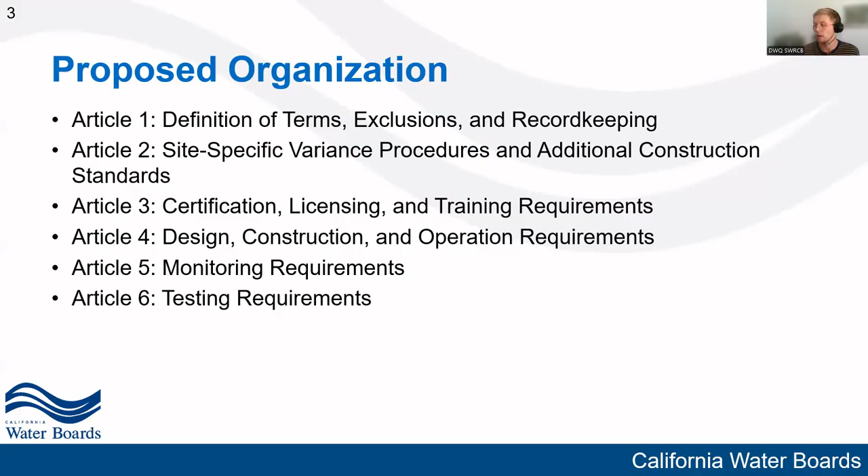Articles 4, 5, and 6 are really the meat and potatoes of this rewrite that establishes the construction, monitoring, and testing requirements for all underground storage tanks that'll be regulated under this new chapter. Article 7 is our unauthorized release reporting and initial response requirements article. 8 covers closure requirements. 9 is our permit application, UPA requirements, trade secrets, and red tag requirements article. Article 10 discusses corrective actions and post-closure abatement requirements. And lastly, we have our appendices, which are our UST forms. Those are being updated as well. We've received some feedback in the past on how these forms could be improved, and we took those suggestions and went forward with them.

So without further ado, let's take a look at our new Article 1. The first definition I'd like to discuss today is the definition for abandoned underground storage tank. This is a UST that has not had a functional release detection system for more than 365 days, does not have a current operating permit, has not been permanently closed or temporarily closed in accordance with the new regulations, and is not what we would call a decommissioned tank.

Abandoned tanks, temporarily closed tanks, and decommissioned tanks all kind of look the same at first glance. We wanted to make sure we had a clear definition of what an abandoned UST was, just because they have different regulatory requirements than those other two classes of tanks. For example, these abandoned tanks will need to be inspected annually and before they are permanently closed in accordance with this chapter. Also, this definition plays a little bit into something we'll talk about later as far as tank reuse is concerned. More new definitions.

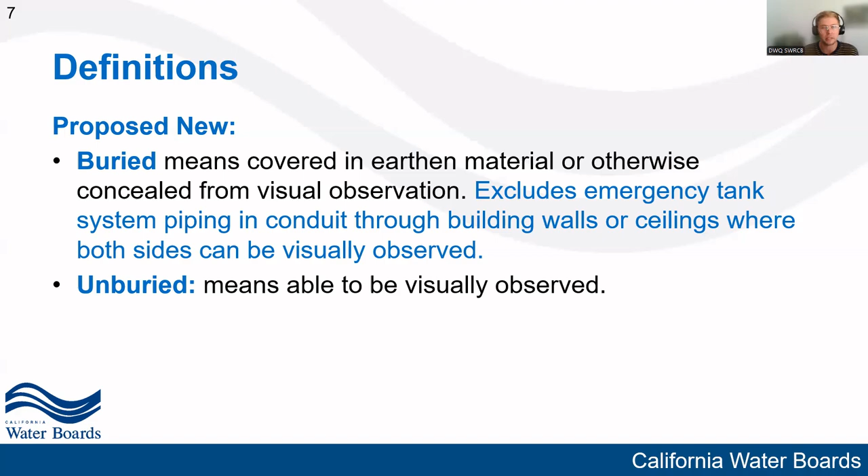We added this exclusion here in blue for emergency tank system piping that is within conduit going through building walls or ceilings if both sides of that can be visually observed. This was based on feedback that we received during our comment period and felt like it should be in our regulations just based on the issues discussed. For clarification, unburied will just mean able to be visually observed, basically the opposite of our term buried.

Another couple terms that are linked together, we have continuity and zone. Continuity being the interstitial space within a zone that is open and testable and allows for the unobstructed flow of hazardous substances. Continuity is one of the key aspects of determining whether or not our secondarily contained systems are adequately monitored under these proposed regulations.

If there's any sort of blockages or cave-ins, we can't say for certain if that interstitial space is being adequately monitored. Continuity will need to be demonstrated periodically as part of the release detection equipment certification, and piping will need to be constructed such that continuity can be confirmed. Zone is the interstitial space of a UST component that is monitored as a single unit. So this could be the tank interstitial space or the piping interstitial space.

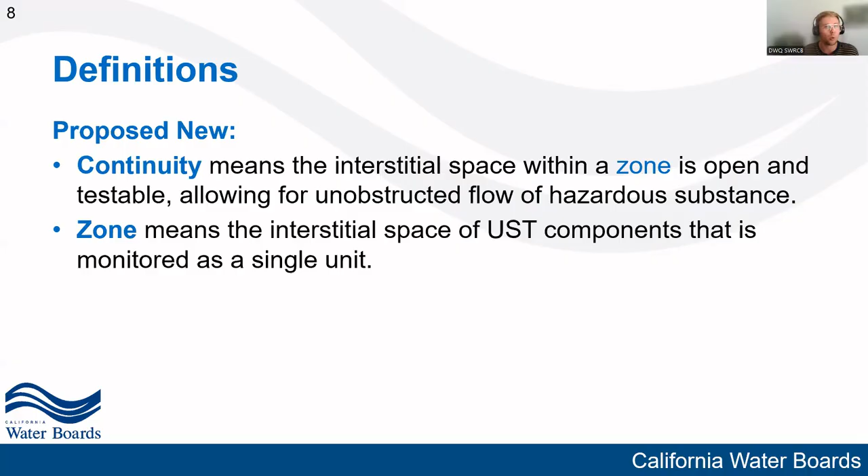We're adding a new class of compliance inspectors to our proposed regulations. Independent compliance inspectors are individuals that perform compliance inspections on behalf of the Unified Program Agency with jurisdiction over a facility or the State Water Board. Independent compliance inspectors need to be independent of the facility that's being inspected, as well as the UPA with jurisdiction over that facility, and still meet inspector training requirements as part of our proposed Section 2634C. We want to make sure that these people who may be helping lower staffed UPAs meet inspection requirements are still qualified to perform those compliance inspections.

We're using the term submit pretty specifically in our proposed regulations, and it means one of two things. If the owner or operator is submitting something to the Unified Program Agency, that information needs to be electronically submitted through CERS or other local reporting portal. All other submittals to the Cleanup Oversight Agency, so this being the Regional Water Board or your local oversight program, must be submitted electronically through GeoTracker.

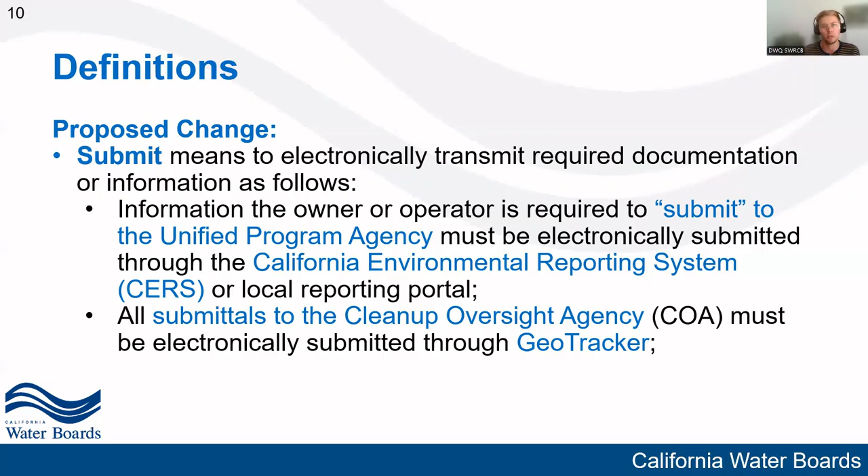And later on in this presentation, we'll show some images of the new GeoTracker portal that'll help automate some of this communication. But know that when we use the term submit in these proposed regulations, it's through one of these two channels, either CERS or GeoTracker. Any other information that needs to be provided rather than submitted could be done via hand delivery, mail, email, or fax.

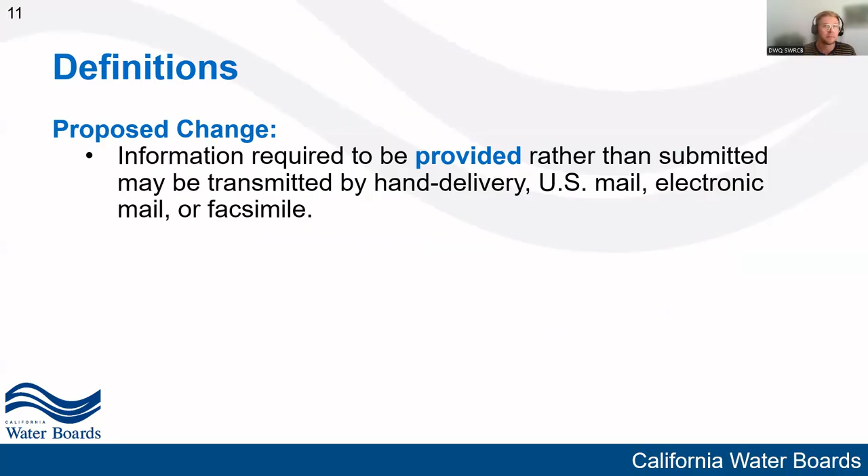We have three different types of USTs in the proposed regulations based on tank install date, type 1, type 2, and type 3. Type 1 tanks will be those UST systems installed before July 1st, 2003. Type 2 tanks being systems installed between July 1st, 2003 and July 1st, 2004. And our Type 3 systems being our tanks installed on or after July 1st, 2004. These tank types are delineated by dates that are consistent with health and safety code, so it made sense to have these definitions in our proposed regulations as well.

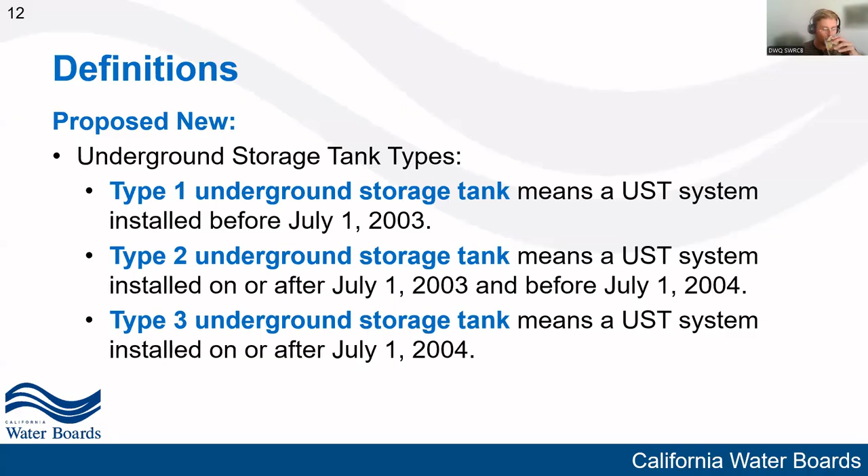We're also adding some violation classifications to the proposed regulations, and Unified Program Agencies, as well as the board, will need to use these violation classifications as part of their inspection and enforcement plans. We have Class 1 violations, Class 2, and minor violations. Class 1 violations being any violation that meets the definition of significant violation. And we have modified the definition for significant violation, but not in a substantive way. Basically, anything that is currently a significant violation will be a significant violation under the proposed regs as well, and therefore a Class 1 violation.

Beneath our class 1 violations, we have class 2s. These are one or more violations that result in a failure to conduct or pass a test. It could be a release detection violation that's not considered a class 1, or it can be a minor violation. And for your minor violation to become a class 2 violation, that minor violation would need to be chronic or committed by a recalcitrant violator.

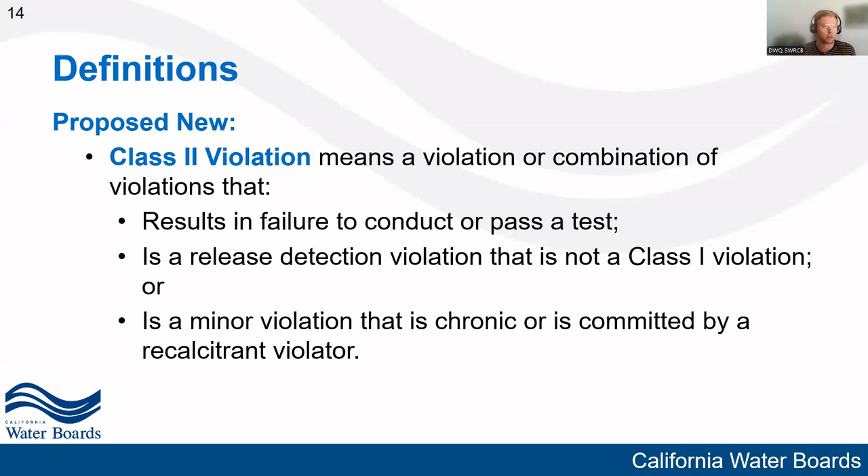Having this graduated scale helps provide a pathway for graduated enforcement so that we can see these systems return to compliance. At the bottom of our violation classification pyramid, we have our minor violations, and this is sort of a catch-all. This is a violation or combination of violations that don't meet the criteria for either a class 1 or a class 2 violation.

Record keeping is also part of Article 1. These records need to be maintained for the life of the UST system: installation, test results, manufacturer's checklists and manuals, and as-built drawings. This is all very important as far as looking back on the history of that system and seeing where something may have popped up that could be an issue that is making itself present later on.

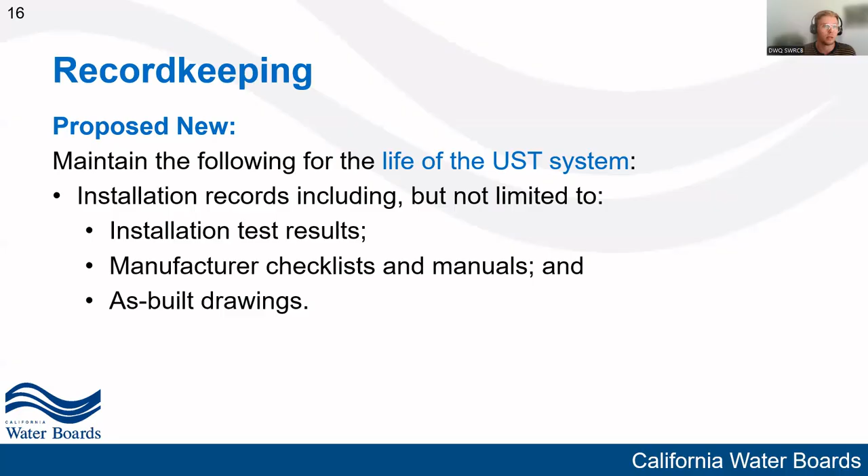Those as-built drawings particularly can be very important to maintain for the life of the system in case there's any sort of repairs to the piping or structures of that matter. Additionally, we'll want records of repairs. So maybe you had a tank lining. We'll want the structural integrity certification associated with that.

We'll need to keep those tank calibration charts as well as our unauthorized release reports. Those tank calibration charts are particularly useful for our overfill prevention equipment inspections to make sure that our OPE is being activated at the proper height.

Electronic records that are readily accessible on-site during inspections will satisfy the requirement for on-site records. UPAs can still approve off-site record storage, but they need to document that approval and any conditions of that approval.

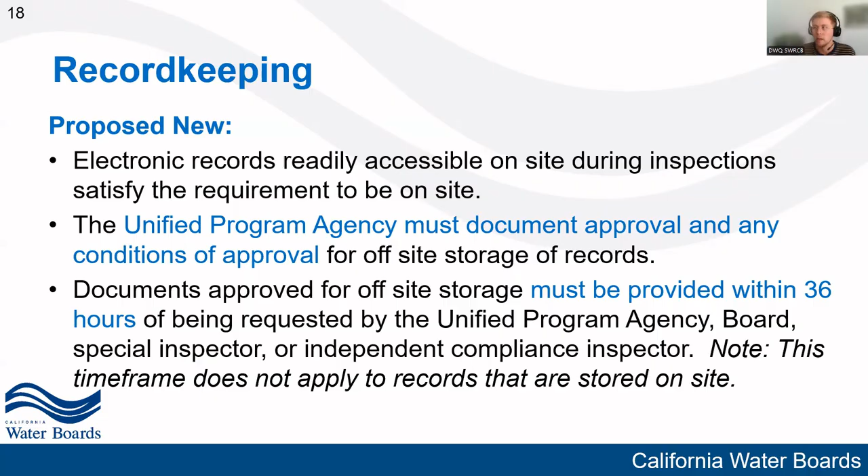Documents that are approved for off-site storage must be provided within 36 hours of being requested by either the UPA, board, special inspector, or independent compliance inspector. This does not apply to records that are stored on-site. Those are expected to be provided upon request.

Approval for site-specific variances will need to be submitted via CERS or local electronic reporting portal. Site-specific variances are very rare, so we want to make sure that we're adequately tracking them, and tracking them in CERS seems to be the best way to do this. We want to make sure that they are consistent with our permit requirements as well as still in line with protecting the soils and groundwater of the state.

Test notification. So this is also a part of our administrative article, but owners and operators will need to notify the UPAs in writing at least 72 hours prior to conducting a test unless waived by the UPA. And part of the reason we have it in this administrative article is so that UPAs can waive this without having to go through more formal procedures, as we'll see described in Article 2. Obviously, we'll want to still make sure that these UPAs are being notified, but they do have the discretion to waive that 72-hour requirement.

So Article 2, our site-specific variance and alternative construction requirements article. This is a change here. We are requiring that the regional boards consult with the unified program agencies and the State Water Board during site-specific variance review. In the past, this has been only the purview of the regional boards. However, they have a tendency to reach out to us at the State Water Board anyway, just for additional guidance.

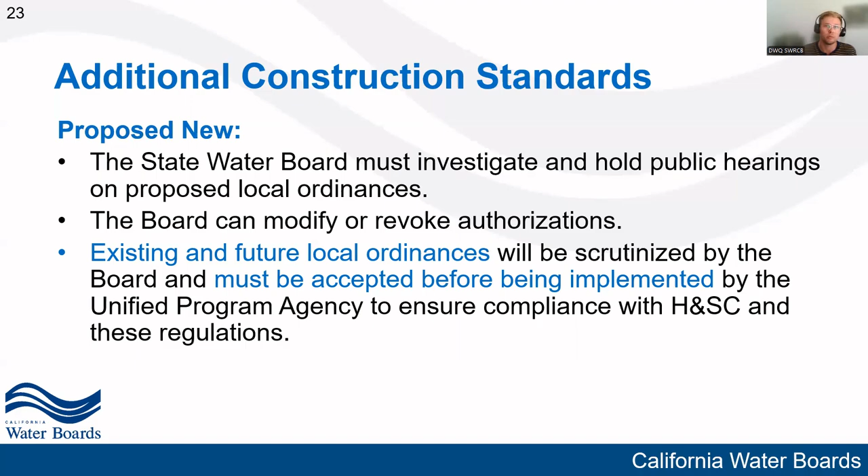Article 3 covers our training requirements for UST personnel. Owners and operators will need to submit the information that identifies their designated UST operator for that facility in CERS. So right now, under our current regulations, we have an appendix for the DO identification.

Moving forward in CERS NextGen, there will be data fields that will need to be filled out, providing very similar identification material. Tracking this in CERS allows for better research and record pulling of these DOs, and it just seems to be a better system.

Additionally, we're going to require that the name of the DO in CERS must be identical to that individual's name on their ICC UST system operator certificate. In the past, we've seen issues with Jims and Jameses and seniors and juniors that have similar names, but they're not identical. And we just want to make sure that the people who are performing the duties of the designated UST operator are actually the people that hold that ICC certification.

For the DO visual inspection report form, we will be requiring that the DO attach a dated release detection alarm history that's generated by the release detection system since the previous visual inspection. This will verify that that alarm log is consistent with the day that the designated UST operator performed their inspection. Now, if the release detection system cannot generate that report, the DO will be required to attach a copy of the facility's alarm log.

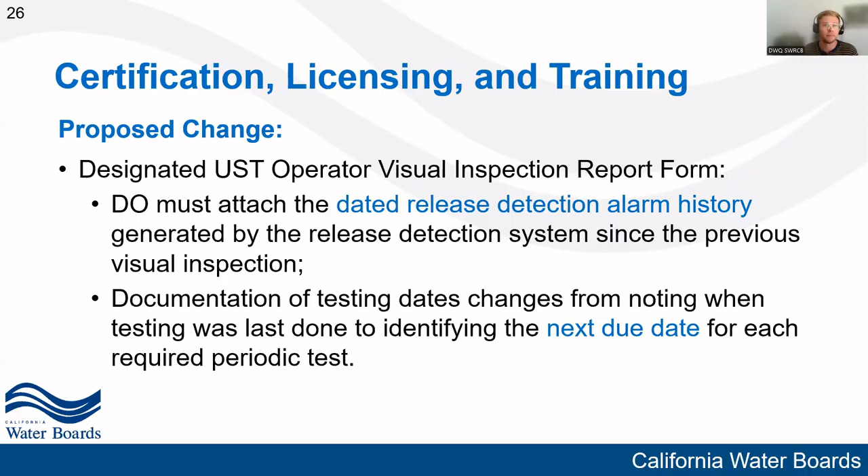Installation or repair work, excluding release detection equipment that does not require excavation or backfill, may be performed by either a service technician or any individual that meets the licensing, certification, and training requirements for UST installation. The training and qualifications for service technicians and installers is not changing. However, the scopes of work for these two classes of UST personnel are being clarified, consistent with one of our local guidance letters that came out probably 2 or 3 years ago at this point. So this is being adjusted for clarification purposes.

Any individual that's performing installation or repair work or is working as a service technician will need to provide all licenses and certificates of training required for the work being performed upon request from the Unified Program Agency, board, or independent compliance inspectors.

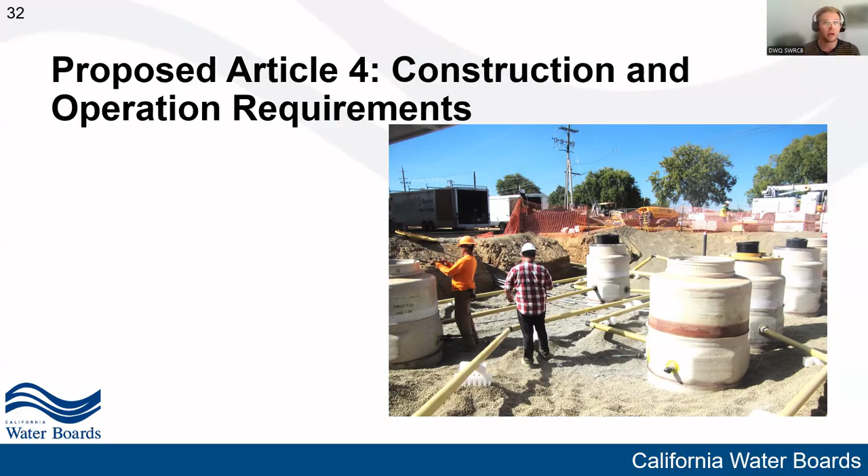So, Article 4, this is where we start getting in the meat and potatoes of the tanks, piping, and release detection equipment. Let's talk first about our construction and operation requirements for USTs. All tank entries under the proposed regulations will need to be made through a manway, and manways will need to be installed per the manufacturer's guidelines, industry code, or engineering standard to ensure that they are properly installed and the integrity of the tank interstice is maintained.

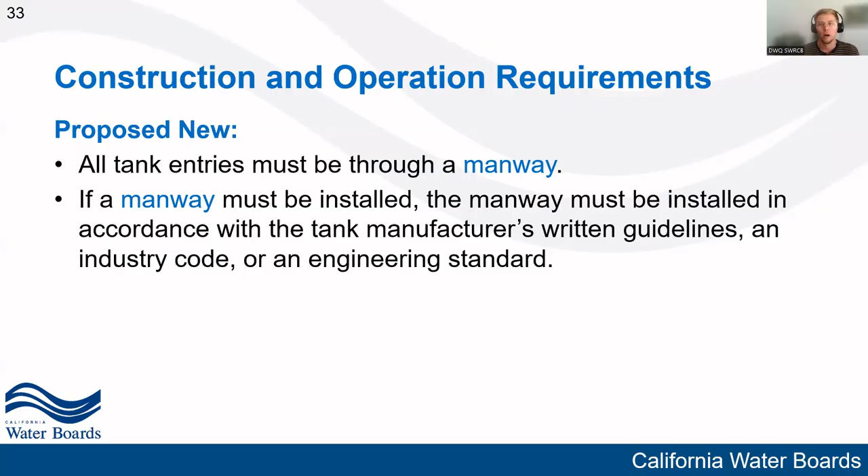When you breach the primary and secondary containment, we run the risk of maybe damaging that interstitial space by either blocking it or crimping it down. And that leads to issues with continuity. And we want to make sure that we're maintaining continuity throughout the system to ensure that the primary and secondary containment are being properly monitored.

For tanks manufactured on or after July 1st of 2026, the manufacturer will be required to provide documentation to the owner that confirms that the manufacturer has verified continuity within the tank interstice. Documenting this from the manufacturer demonstrates that the tanks were built properly and helps serve as a roadmap later on down the road if continuity does become an issue in that system in the future. We can kind of go back through our records and see when that issue may have occurred.

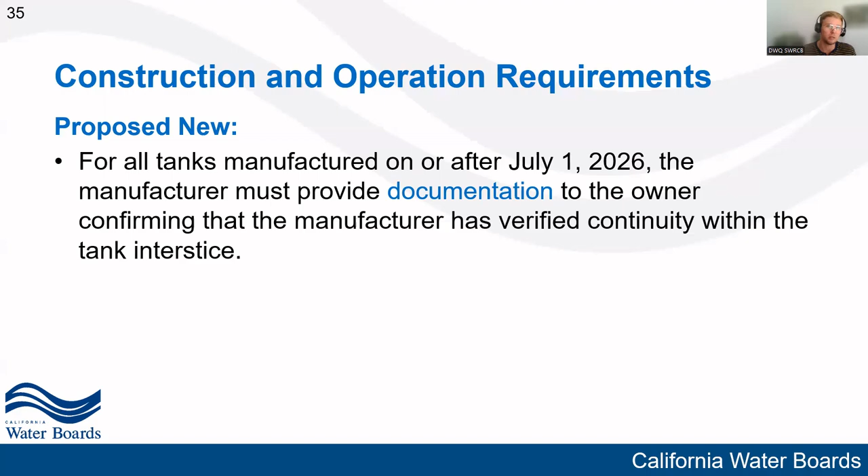This slide is a new requirement, but is likely already a best business practice in the industry. Steel piping that's installed on or after January 1st of 2026 will need to be factory coated black steel that meets ASTM A53. Again, we want to have a minimum thickness requirement for our steel piping that we currently don't have in our existing regulations. We'll be requiring minimum Schedule 40 thickness for our primary containment piping and for our secondary containment piping, Schedule 10 thickness.

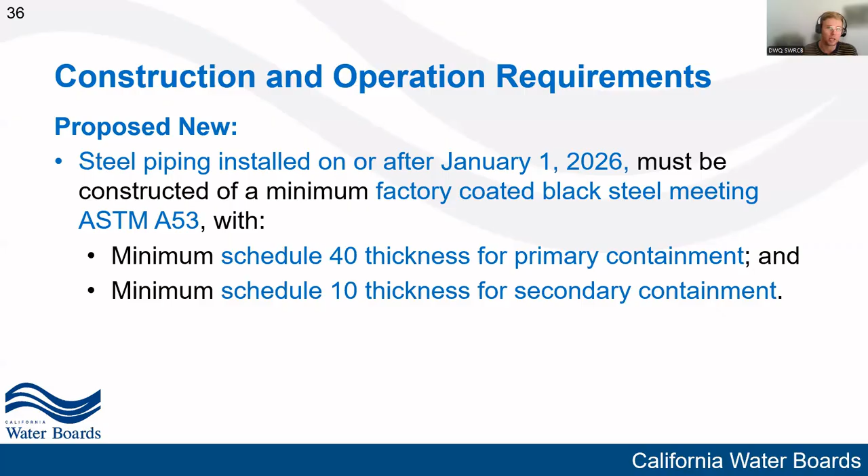For tanks that are installed on or after January 1st of 2027, so a year after these regs have been in effect, they will need to be anchored to prevent flotation using methods specified by the manufacturer, industry code, or engineering standard, or in accordance with an engineering spec approved by a California registered PE. Now, the operative word here is being anchored. We want these tanks physically attached to the ground to ensure that they cannot float.

Our current requirement under the existing regulations is for tanks in areas of high groundwater. And as we've seen in the past, if we have a tank pit open during construction, even in areas of low groundwater, if a storm event comes through, a lot of times those tanks can float, and that is an expensive fix. Moving forward, we'll be requiring that these tanks be anchored at installation, all of them, so that they can avoid that costly repair later on.

Any water that's used to ballast tanks during construction needs to be completely removed and disposed of to the satisfaction of the Unified Program Agency. We want to make sure that installers are not overwhelming municipal water systems, or if for whatever other reason there's restrictions on how to dispose of ballast water, we want to make sure that it's to the satisfaction of the UPA.

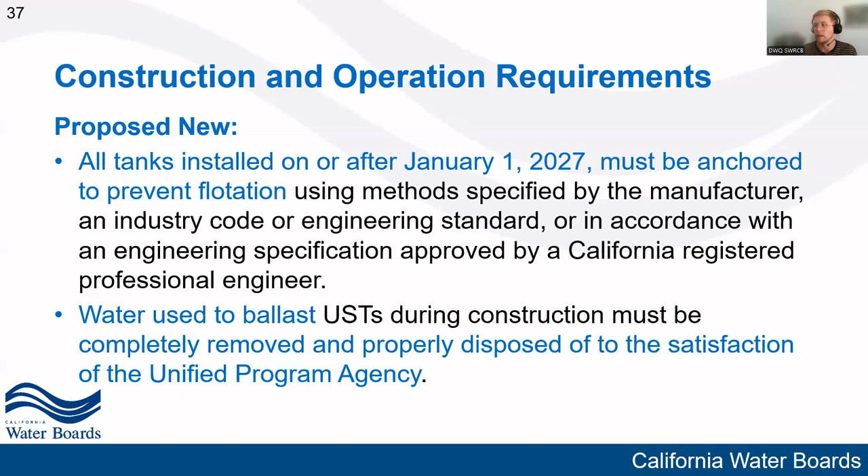For non-integral secondary containment components that use isolation as a form of corrosion protection, any repair made to that component as far as corrosion is related needs to confirm that that component is isolated from the backfill. Basically, if we look into something, we see that there's rust on the inside. We don't want to just simply patch that or spray over it. This may require some additional excavation, but we'll need to verify that the exterior of that non-integral secondary containment still has isolation on the outside, right? So even if we just patch that internal repair, that may not fix the underlying issue of maybe a breach on the outer side of that secondary containment.

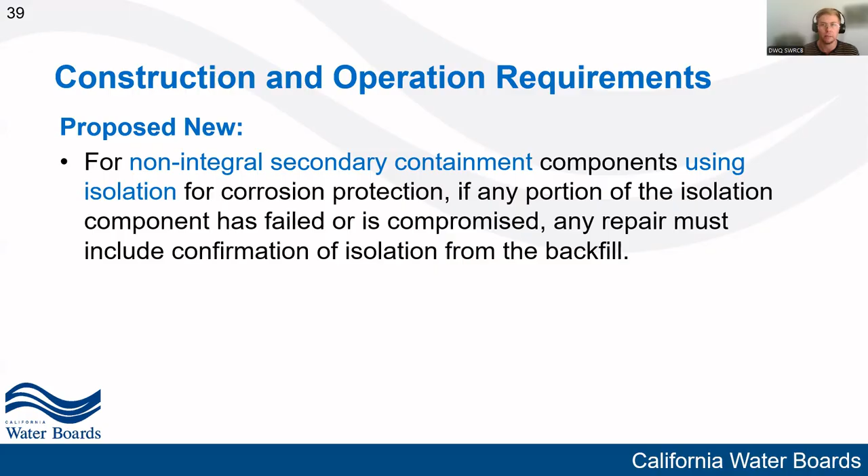Next, let's talk about some monitoring requirements. So we're making some changes to the monitoring site plan. This will need to be a scaled diagram, and it will need to indicate the layout of tanks, piping to the extent known, and containment sumps. Obviously, there are old and convoluted piping layouts, so the to the extent known aspect can be determined by the UPA. We will also require locations of all release detection equipment be identified.

And if you have a Type 3 system, which is our VPH system, we'll require that each vacuum, pressure, or hydrostatically monitored zone be on the monitoring site plan as well. This requirement for a scaled diagram, as we see in that top bullet here, combines the requirements for our site map and for our monitoring site plan. Now we'll have it in one document instead.

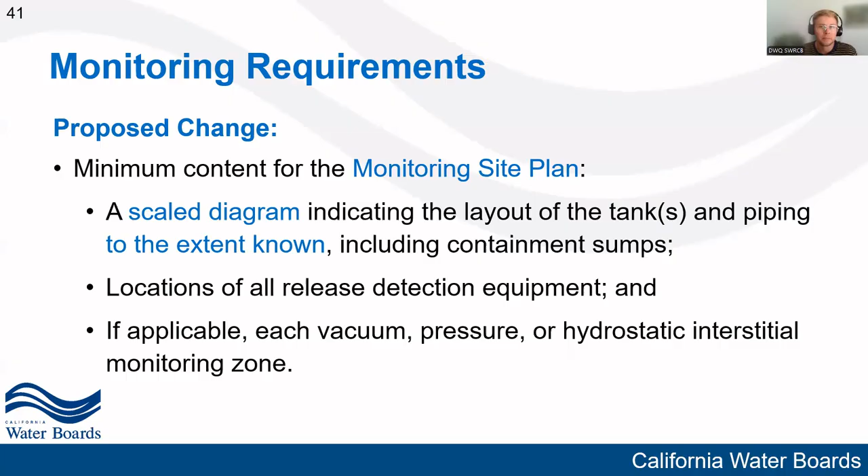So release detection equipment can only be disabled by a service technician with notification to the Unified Program Agency. This proposed requirement changed after feedback received during our comment period. Originally, we were going to require that disabling release detection equipment only occur after approval from the Unified Program Agency, but obviously testing, replacement, and repair can be time-sensitive work. So we have changed this since then to just be a notification to the Unified Program Agency to keep them in the loop.

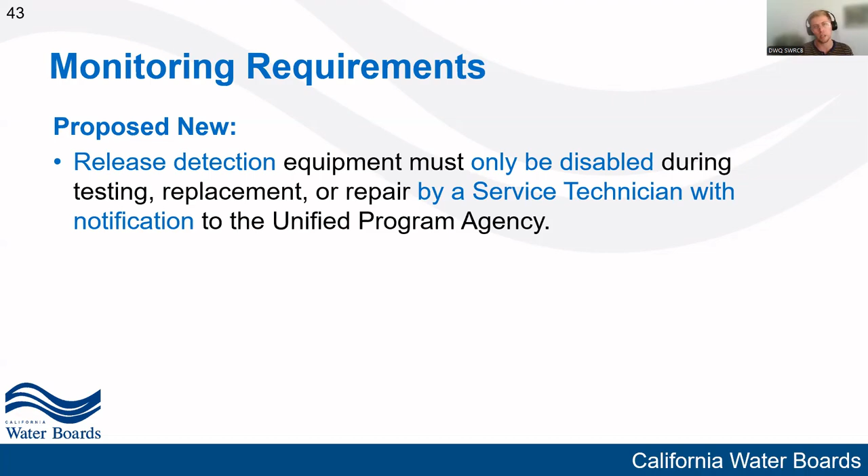For interstitial monitoring release detection equipment that is going to be or is expected to be non-functional for more than 24 hours, the owner will have to implement an alternative monitoring program. This will include physical monitoring of the secondary containment at least once every 24 hours, but the UPA can make that a more frequent physical monitoring interval. The results of this need to be recorded within the facility's monitoring log.

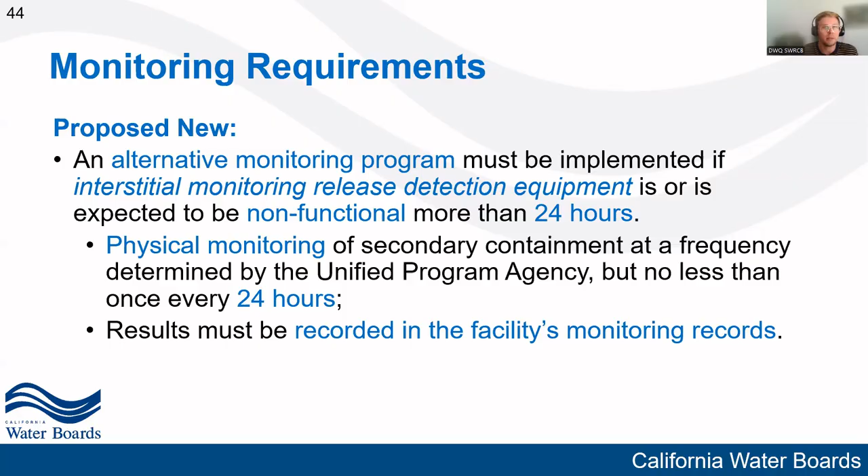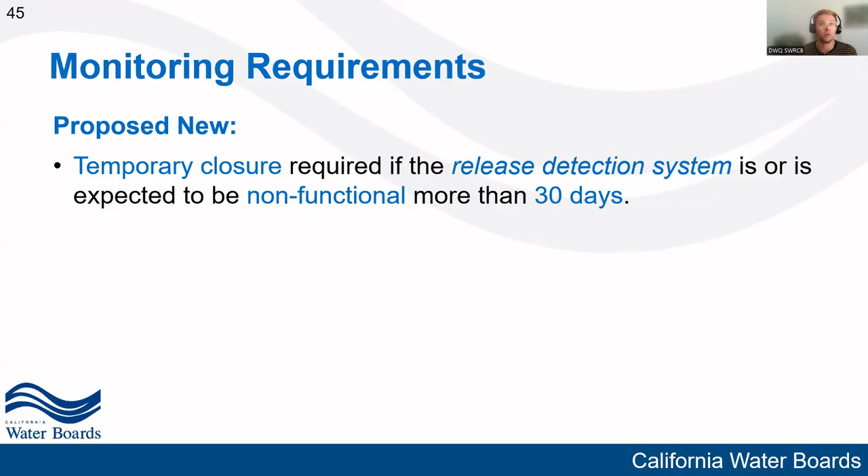This slide is a big change. We'll be requiring mechanical release detection equipment that continuously monitors our UDCs. This includes the impact shear valve. If those fail to function on or after January 1st of 2026, they cannot be repaired. They need to be replaced, and they need to be replaced with continuous electronic release detection equipment before the system can resume dispensing.

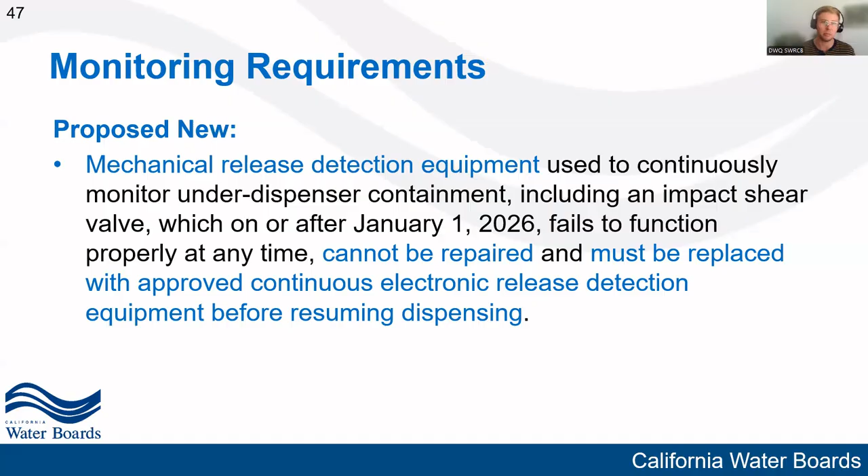Too often we've seen these float trips fail during inspection, and then the dust and grime will be cleaned off of them, and they'll be adjusted in some other way to be passing, and then they'll pass that one time, and then the next time there's a test, they'll fail. To us, this demonstrates that these components don't effectively monitor the under dispenser containment. So if they fail, they got to be replaced with this continuous electronic release detection equipment.

This excludes emergency tank systems. So for all other tank systems, starting July 1st of 2026 that have pressurized piping and are not routinely staffed, those systems must have a continuous interstitial release detection system that stops the flow of hazardous substance when a release is detected from the piping or if the system malfunctions.

The idea here being if you have this remote facility with pressurized piping and there is a release, that pressurized piping can quickly overwhelm our secondary containment that we have on site, and you know that leads to a very large issue. So for those facilities, we'll be requiring that the release detection system shuts off the flow of hazardous substance if there's a problem with the monitoring equipment or if there's a release from the piping.

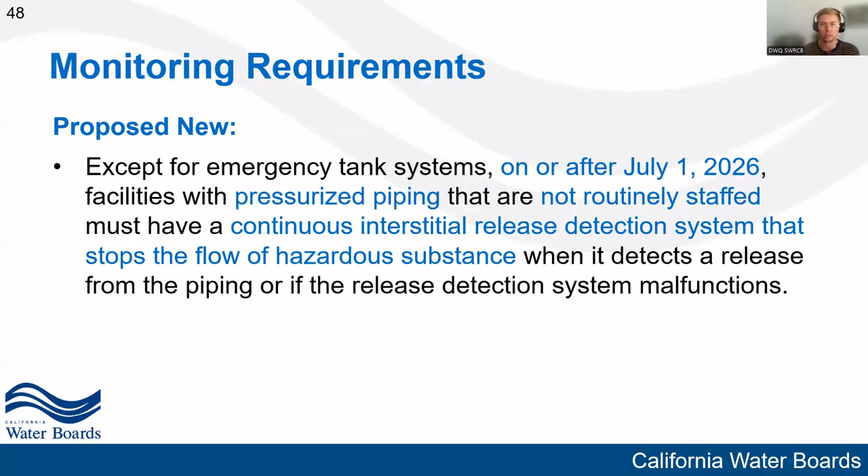Buried pressurized piping that's monitored by continuous VPH release detection systems that shuts off the flow of hazardous substance through the piping when a release is detected or when the release detection system malfunctions will satisfy the line leak detector requirement. Basically, what this means is if you have a fail-safe positive shutoff VPH system, that will meet your line leak detector requirement. VPH systems are very high precision and can make line leak detectors redundant on some systems.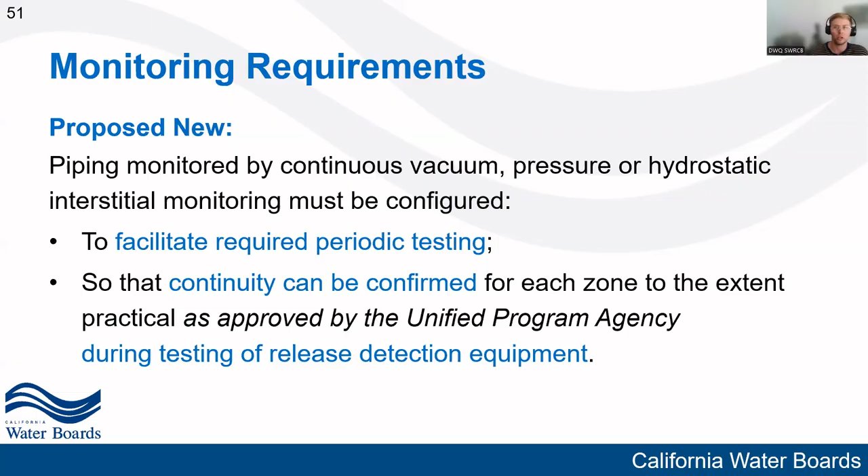Remote monitoring, this is a new definition that we've added, but I've decided to talk about it more in our monitoring article. Basically, remote monitoring needs to allow for immediate notification of a facility employee or a service technician. We know that remote monitoring is already being used under our current regulations. We're just adding this to set a minimum standard for what we mean when we talk about this.

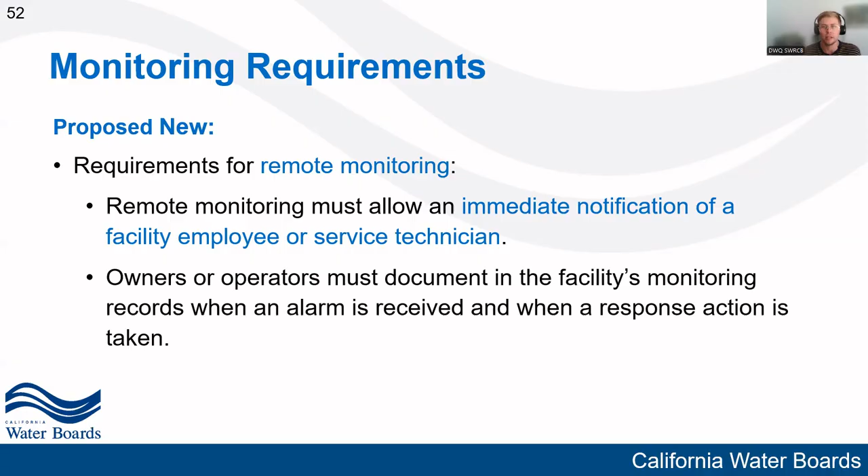Owners and operators of facilities that are remotely monitored will need to document in the facility monitoring records when an alarm is received and when a response action is taken to satisfy the remote monitoring requirements. Article 6 covers testing. First slide, we're reducing the ELD test results submittal deadline from 60 days to 30 days. This is consistent with other submittal timeframes of other testing reports, and there's no reason to have ELD test results take longer than 30 days, and oftentimes they're available much more quickly.

This is a big change. We're getting rid of the test hierarchy for spill containment, overfill prevention equipment, and secondary containment. Basically, under our existing regulations, you're required to use the manufacturer's guidelines for testing these components. If there's no manufacturer's guidelines, then you can use an industry code or standard. If there's no manufacturer or industry standard, then you can use a PE developed standard as approved. Moving forward, each of those will carry equal weight.

The idea here is that we can improve flexibility for some of our more complicated systems, or if there's test methods that are more cost effective or result in less system downtime that still test the components as stringently, then we would like to see those be used in the States or in California as well.

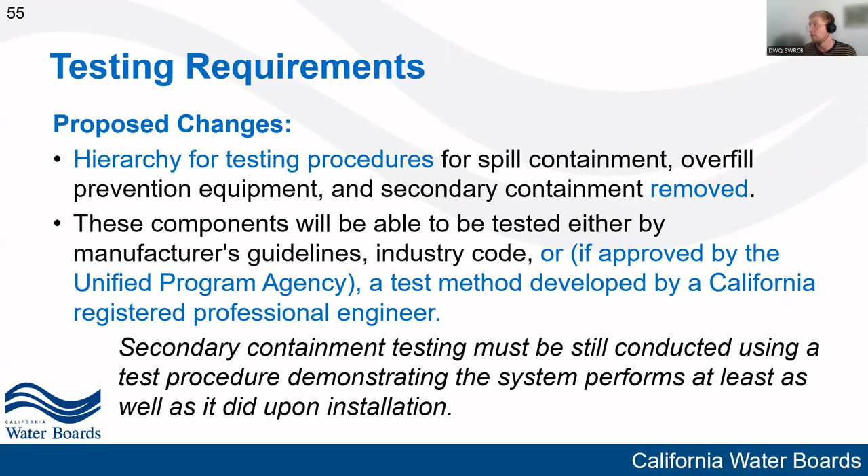Test equipment will need to be calibrated and maintained in accordance with the test equipment manufacturer. So, for example, the line leak detector test box from VMI is required to be sent into the manufacturer either every 2 or every 3 years to make sure that it's in proper working condition. Obviously, our release detection equipment is only as good as our test equipment is. So we want to make sure that our test equipment is in proper working order.

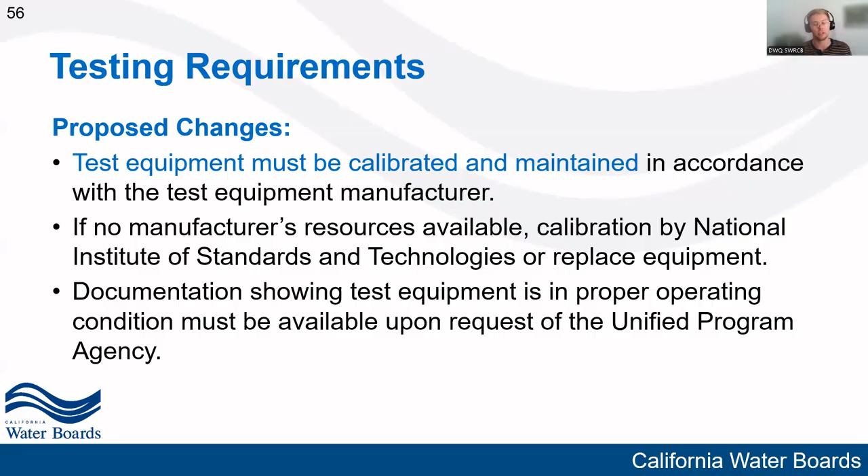Now, if no manufacturer's resources are available for this test equipment, we will require calibration by NIST, the National Institute of Standards and Technology, or what most people do under our existing regulations is to just replace the equipment. Documentation demonstrating that the test equipment is in proper operating condition will need to be made available upon request by the Unified Program Agency. Again, we want to make sure that our release detection equipment is being adequately tested by our test equipment.

This kind of goes back to our monitoring article, but secondary containment testing and release detection equipment for VPH monitored piping must verify continuity between the sensors and the most distant points in the zone as approved by the Unified Program Agency. This will help verify that there's been no breaches or cave-ins, etc. that'll limit the monitoring ability of that release detection equipment.

This is a big change, but it affects a small subset of tanks, or rather systems. Line leak detectors that are used for performing annual line tightness tests, so that 0.1 GPH at 150% operating pressure, will need to be tested with the simulated 0.1 gallon per hour leak at 150% operating pressure.

Currently, those line leak detectors that are performing these annual line tightness tests are only verifying that they can find a 3 gallon per hour at 10 psi release. We want to make sure that they can find this 0.1 gallon per hour.

This will not apply to Type 3 USTs, our VPH systems. It will not apply to lines that are tested by a licensed tank tester, and it will not apply for UST systems that have piping equipped with fail-safe interstitial monitoring. So it's a big change for a small set of UST systems.

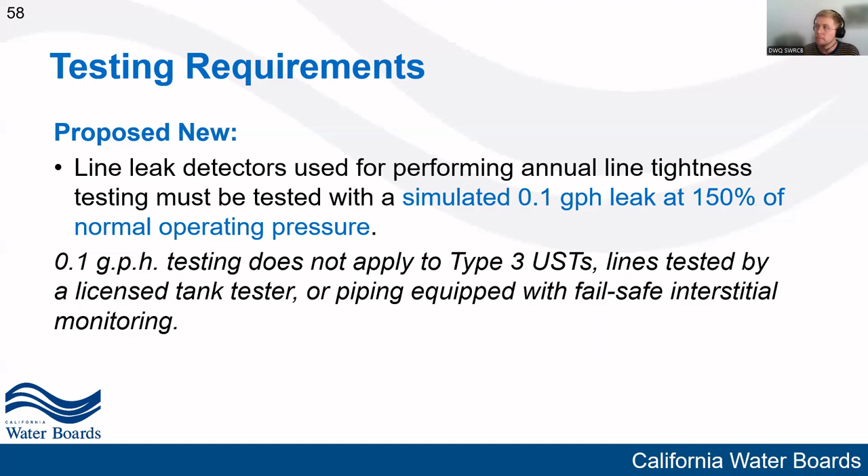Article 7 discusses our release reporting. So we're changing the title of the owner and operator's initial report that they send to the Unified Program Agency to the preliminary written report for clarification in the reporting side of things. We're also requiring that this preliminary report include the facility address as well as the facility ID number to help better track releases.

If necessary or if required by the UPA or COA, the owner will need to remove any remaining stored hazardous substance within that UST if it's had a release to prevent either further releases to the environment or to facilitate corrective action.

The UPA will be required to submit preliminary written report data to include sample analyses or other data. They will be required to submit that to the cleanup oversight agency, again, your LOP or regional water board, within 60 days of receipt from the owner operator. The cleanup oversight agency will then review all that documentation submitted by the UPA within 30 days of receipt.

As we'll discuss in our Article 8, we do have this GeoTracker portal that streamlines a lot of this communication with automated emailing as far as like, I've received this, send it to this person, which can be populated by SWRS ID among other details.

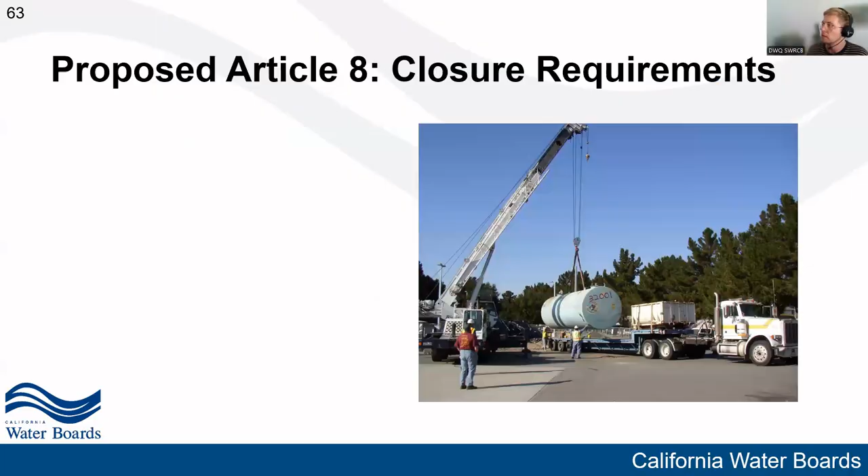So here's what that looks like. Sorry, this is our Article 8, our closure requirements. So here's what that new GeoTracker portal looks like. I believe it's already up and running. Basically, you can input your facility SWRS ID, and then from that, it'll populate a lot of the information on these fields here. And when you submit this form, depending on the individual submitting it, it'll provide it to the next required step in that communication, I guess.

Here are some new requirements for temporary closure. The owner and operator must receive approval for temporary closure prior to initiating temporary closure. These requirements are being added to the temporary closure inspection requirements. So we'll require that the owner operator verify that the tank is inerted. If applicable, the UPA can waive the tank inerting if they see fit.

They will need to document the results of this inspection and make inspection documentation available within 36 hours at the request of the Unified Program Agencies. And these temporary closure inspections will occur every 90 days.

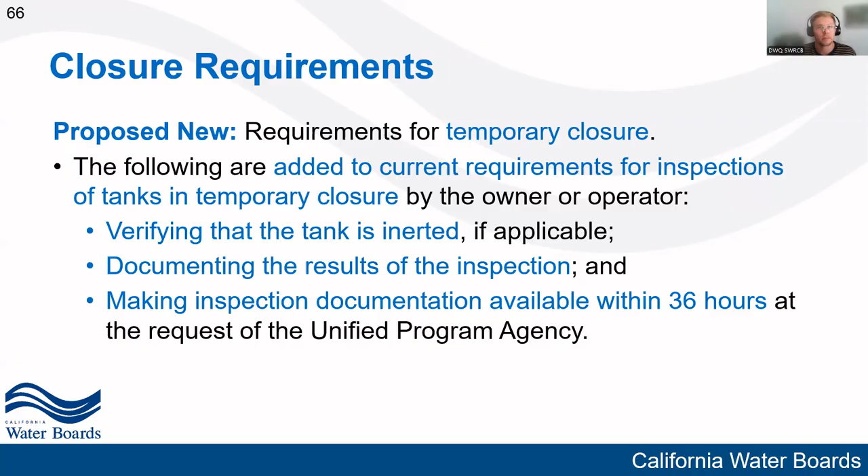For permanent closure, we will require that permanent closure procedures be completed within 365 days from when that system is no longer storing hazardous substances from the date of approval by the Unified Program Agency. It would be unreasonable for permanent closure processes to take longer than 365 days, which was how we developed this window of time for a permanent closure. We added this to regulations to ensure that these systems going through this process don't languish and are closed and have no more issues associated with them.

We're also making some changes to our sampling requirements for permanent closure. So soil sample collection needs to be performed immediately after removal of the tank or hazardous substance piping from the excavation. This is critical because a lot of what we store is volatile and we want to get an accurate representation of what has leaked into the soil in that event. Same thing goes for groundwater sample collection. That needs to happen immediately after water enters the excavation or is otherwise encountered.

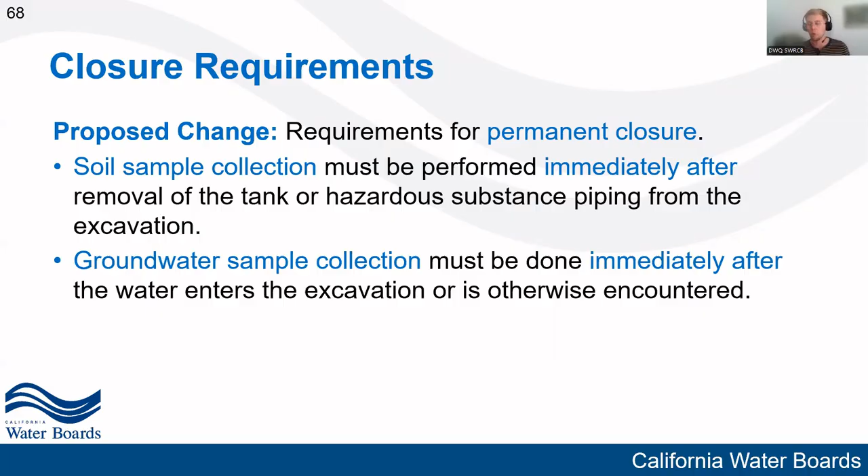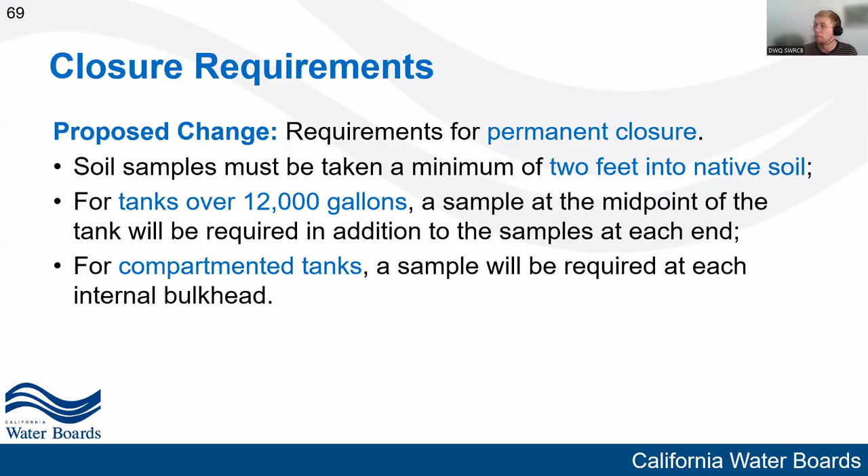We've updated our sampling requirements in this regard as well. Soil samples will need to be taken a minimum of 2 feet into native. For tanks that are over 12,000 gallons in capacity, we'll require an additional sample at the midpoint of the tank, as well as the samples at each end of the tank. And for compartmented tanks, we'll require a sample at each internal bulkhead.

For hazardous substance piping, we'll require sample collection every 20 linear feet. And for rigid piping, at each change in direction. So if you have an elbow or a T, we will want to see a sample taken at that location as well. Additionally, we'll require sampling taken under each dispenser.

As part of the closure report items, we'll want to see site maps or drawings that identify the location at the facility, depth below grade, and the date each sample was taken. If there's boring logs associated with the closure report, we'd like to see those as well. And lastly, we'll want to see documentation that demonstrates proper disposal of the tank and hazardous substance piping and any other hazardous waste. So copies of manifests signed by the receiving facility or receipts of recycling.

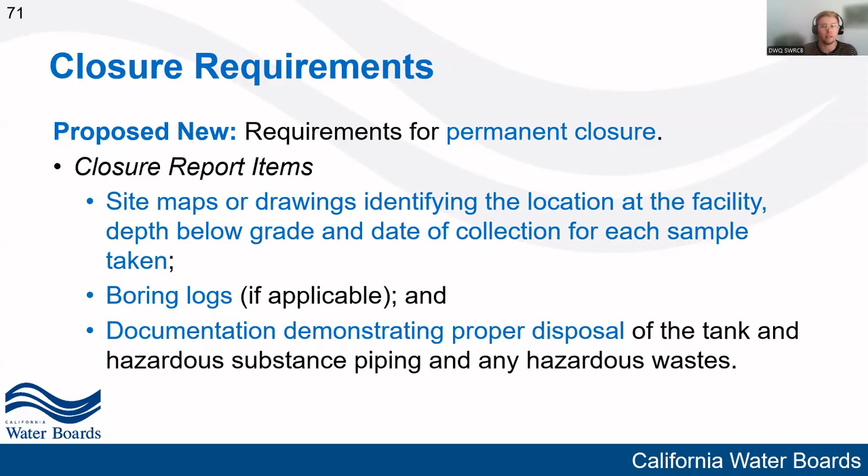The information on this slide will need to be provided from the Unified Program Agency to the Cleanup Oversight Agency as part of the permanent closure process. UPA name and contact info, facility CERS ID, name, address, owner information, CERS tank ID for each tank that's closed, date that the system was closed, volume in each tank, previously stored hazardous substances, sample information, closure inspection reports, and lab analyticals.

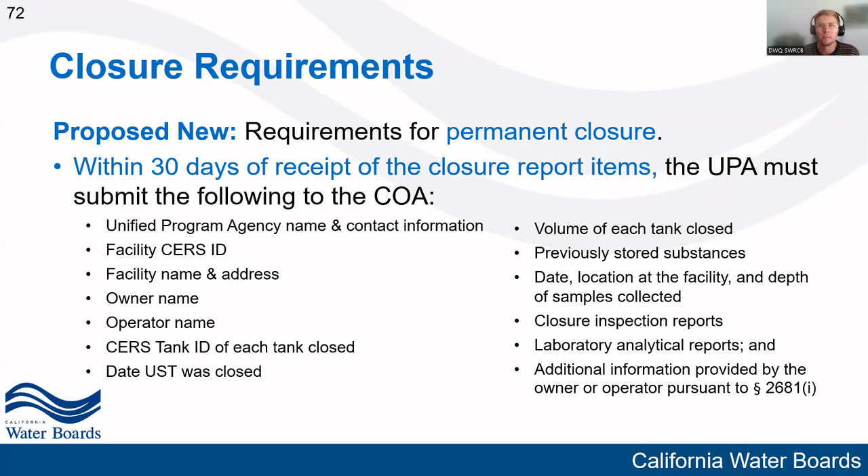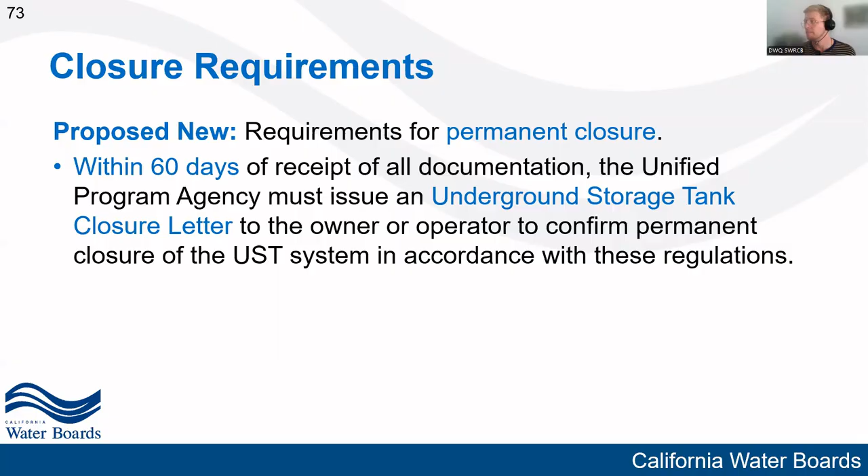Within 60 days of receipt of that documentation, the UPA must issue an UST closure letter to the owner or operator that confirms that their system is closed in accordance with these regulations. This is a good step to really ensure that the owner knows that no additional work is required on their part for their UST system. That UST closure letter will need to include the facility CERS ID, name and address, owner name, tank ID, type of closure, is it removed or is it closed in place, and name of the cleanup oversight agency that has jurisdiction over it.

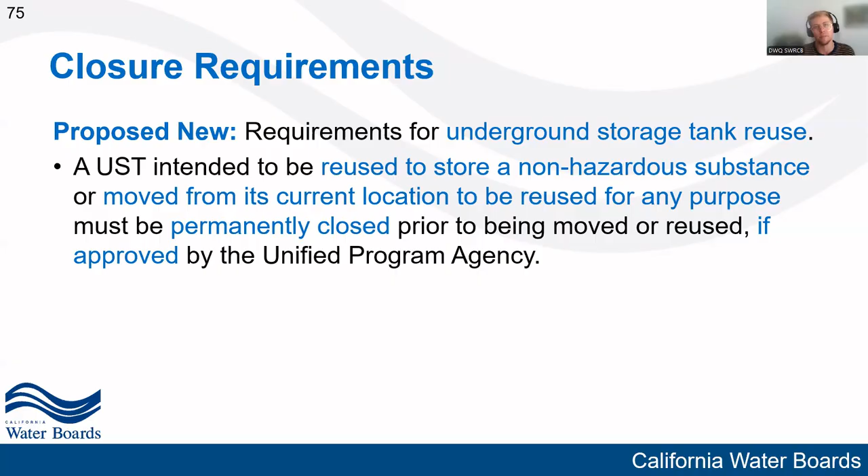So reuse. This is new to our regulations. If there's a tank that's intended to be reused to store non-hazardous substances or is moved from its current location to be reused for any purpose, it needs to first be permanently closed prior to being moved or reused. This is all contingent on approval from the Unified Program Agency. Owners and operators will need to provide the following information to the UPA within a time frame specified by the UPA before that tank can be reused. This information will include the name of the new owner or operator, the location of the intended use, the nature of the intended use, and approval by the UPA with jurisdiction over that facility where that UST will be reinstalled.

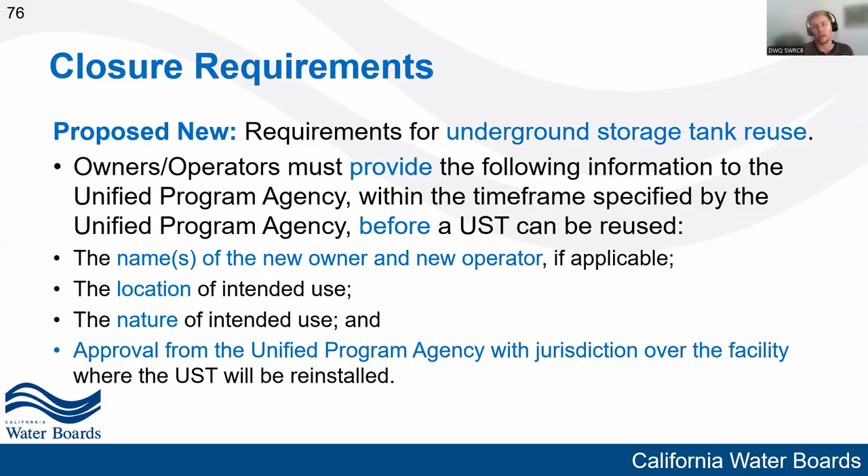Basically, any of these tanks that are being reused to store hazardous substances will need to be a type 3 UST. We understand that this is a high bar. However, we find that this is essential when you're taking a tank out of the ground, moving it somewhere, and then reinstalling it. There's a number of instances where something could damage that tank. We want to make sure that it is in the best operating condition it can be in before it's being placed back into service.

So for abandoned tanks, this kind of ties into the reuse. They cannot be placed in temporary closure and must be permanently closed in accordance with these regulations. However, they can return to operation if they are equipped with VPH interstitial release detection systems, as well as pass an enhanced leak detection test. So if you have an abandoned tank and it can be upgraded to be a VPH tank and it passes an ELD test, then it does not need to be permanently closed.

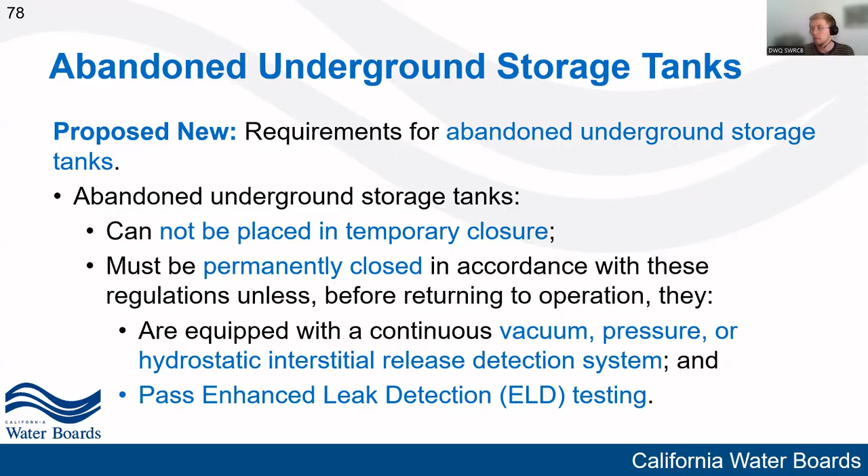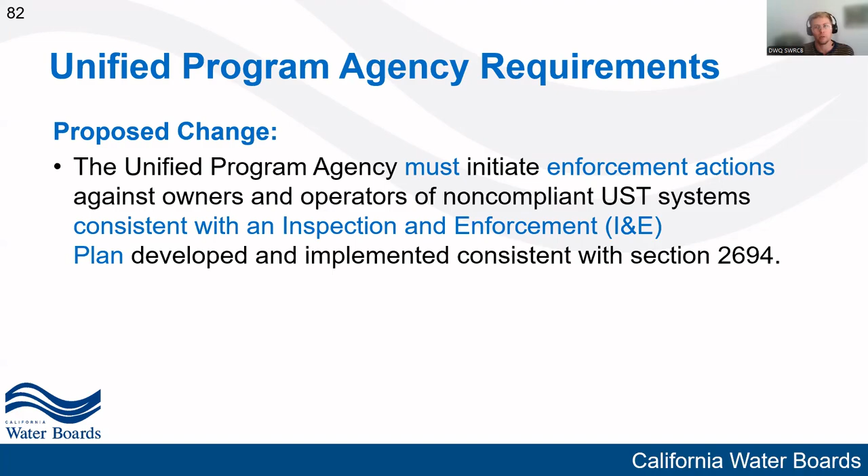Both the Unified Program Agency and the State Water Board must initiate enforcement action against owners of non-compliant UST systems that's consistent with an inspection enforcement or I&E plan developed and implemented consistent with Section 2694. This I&E plan needs to be consistent with Title 27 and will promote effective detection, abatement, and deterrence of violations and provide a clear path forward as far as graduated enforcement is concerned and improved tracking of action and communications between the UPA and then owners and operators of non-compliant systems.

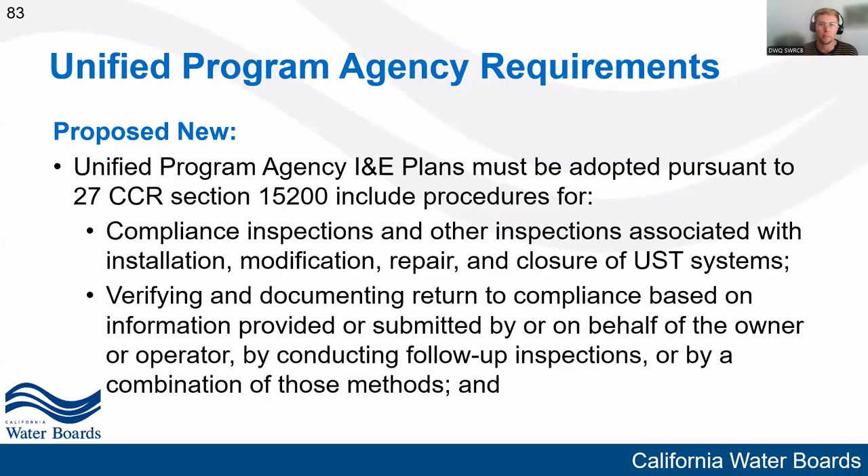Here kind of covers what I already covered, but that I&E plan needs to be adopted pursuant to Title 27, include procedures for compliance inspections and other inspections associated with installs, modifications, repairs, and closures, and verify and document return to compliance based on information provided or submitted on behalf of the owner or operator by conducting follow-up inspections, and have procedures for progressive enforcement actions initiated against owners and operators. So these I&E plans will be required to use minor, Class 2 and Class 1 violations and include procedures on how to elevate those violations accordingly.

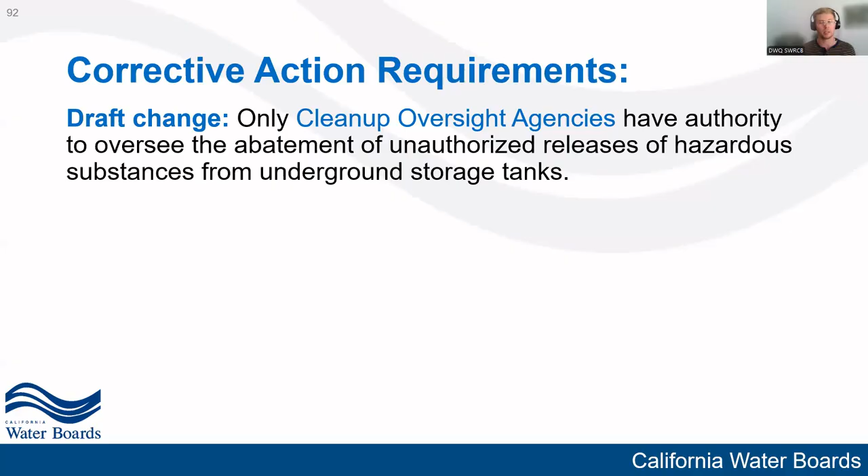All right. Corrective action requirements. Only cleanup oversight agencies, so your local oversight program or regional water quality control board, have the authority to oversee abatement of unauthorized releases of hazardous substances from underground storage tanks. This helps resolve any conflicts between UPAs and COAs during cleanup activities and clearly establishes who is responsible for what during corrective actions.

Owners and operators can perform interim remedial actions during the preliminary site assessment phase if there's an imminent threat to human health or the environment. If they go this route, they will need to notify the cleanup oversight agency that has jurisdiction over their facility. Any free product at the site will need to be removed to the maximum extent practicable as determined by the cleanup oversight agency. And the free product removal report must be submitted within 45 days of release confirmation.

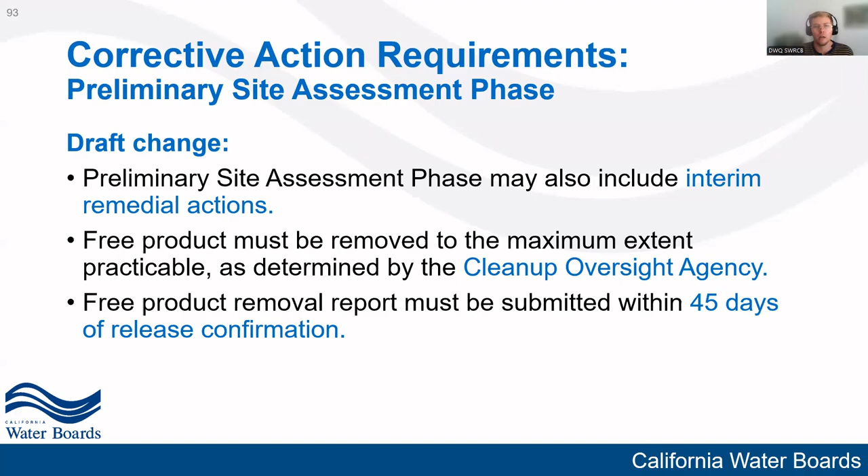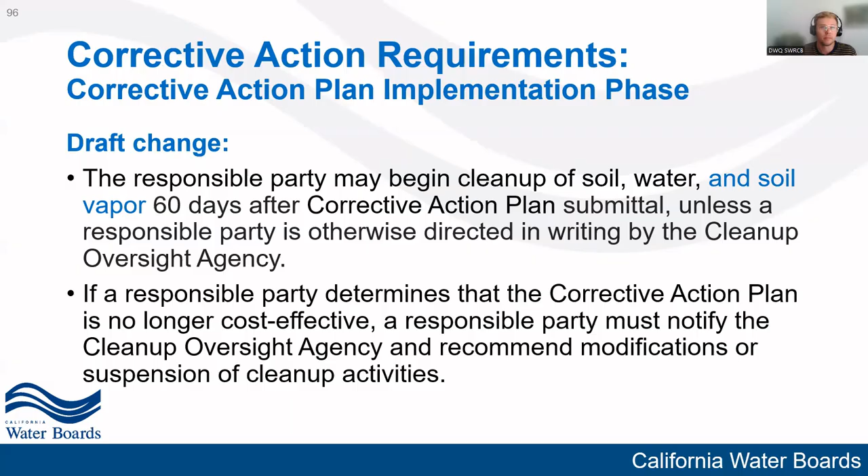As part of the closure preparation phase, the responsible party must complete activities after the cleanup oversight program agency notifies that the UST is eligible for closure, prior to being issued a closure letter pursuant to section 25296.10 in chapter 6.7 of Health and Safety Code. This indicates what the closure preparation phase entails and more consistently implements this section of Health and Safety Code.

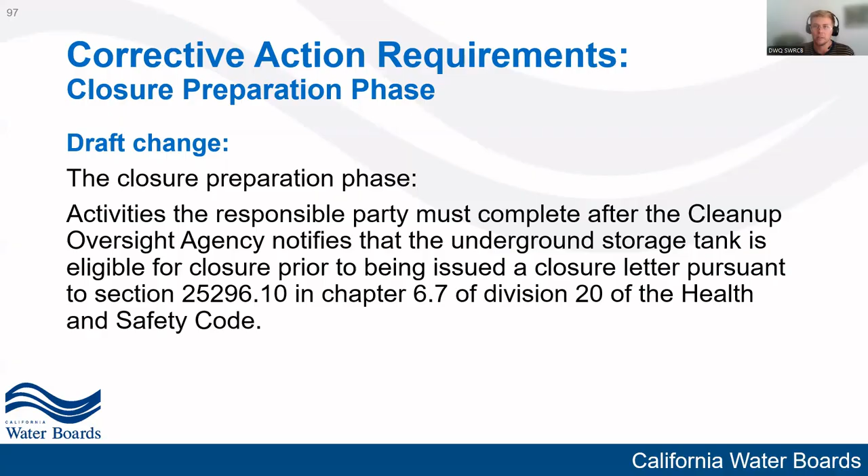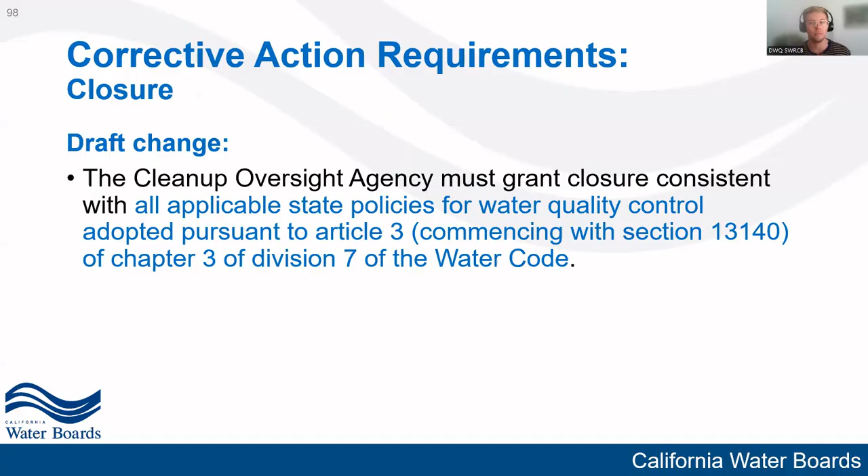The COA may require recording of a land use restriction as a condition of closure of a UST release case for a release of hazardous substance that is not petroleum. This was a gap in our current regulations that we are mending under the proposed regulations. We're adding that hazardous substance releases can also play into this, if the cleanup oversight agency determines that a land use restriction is necessary for protection of public health, safety, or the environment.

All right. The last article are forms. Again, these are part of regulations. Let's talk first with our Appendix 3. This is our facility employee training certificate. We are requiring the facility name and address be on this form. We're also changing the initial date of training to just training date. And then off to the side of that, you will have your designated UST operator signature.

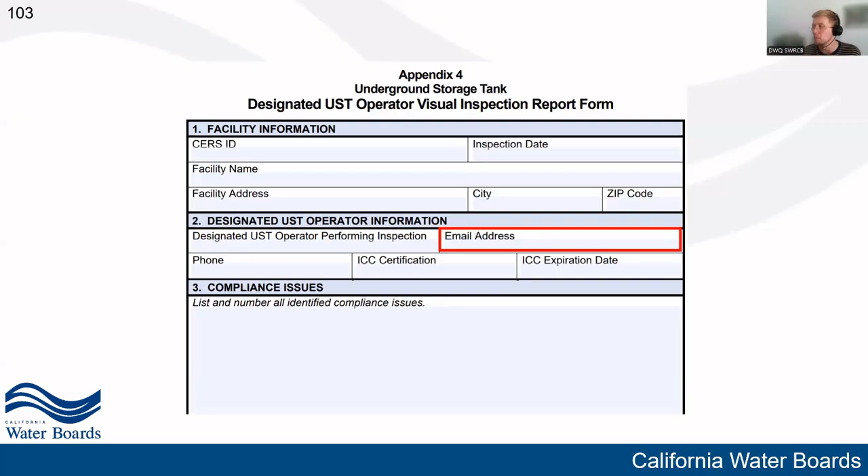Appendix 4 is our DO's visual inspection report form. You'll see here that we are requiring an email address, and this is consistent with some of our other forms as well. Email just seems to be a better or quicker way to get a hold of people these days, so we've added it to a number of our forms. We're also adding continuation pages to this.

We're referring to sumps in our proposed regulations as containment sumps because there's different definitions between Health and Safety Code and our regulations. Anytime we're talking about sumps that are required to be visually inspected, they will be discussed as containment sumps.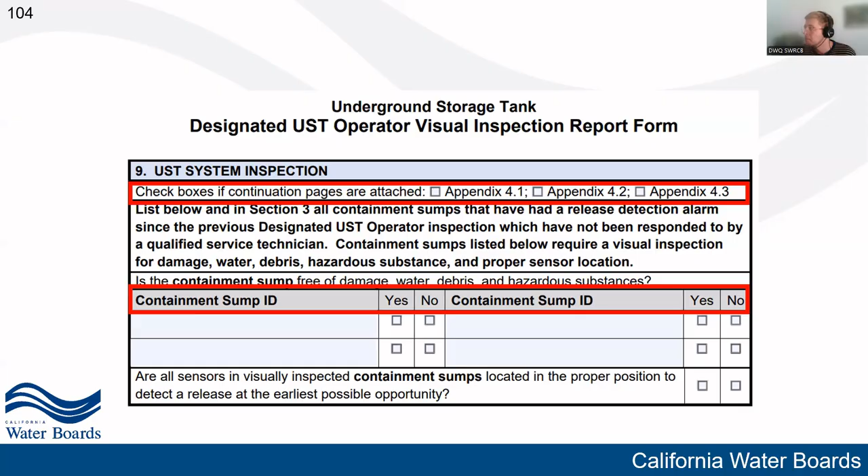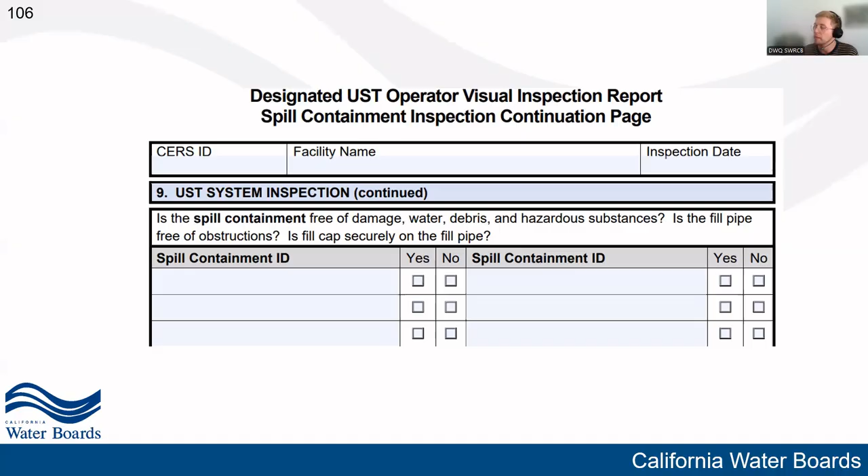We have Appendix 4.1 that is additional, like the Appendix 3.1 for facility employees. If your facility has a bunch of containment sumps, we've added this Appendix 4.1 where you can just continue to list your containment sumps as part of your DO visual inspection report. Same thing goes for our spill containment. Let's say you've got 30 spill buckets. You can add this Appendix 4.2, and the same thing goes for under dispenser containment. This is our Appendix 4.3.

If you remember from the beginning of our presentation, I discussed that we're moving away from documenting the date of last performed testing and maintenance and changing it to the next required due date. Again, this change was made just because in the past, when we focus only on when testing was last due, that just creates this cycle of late testing. Moving forward, having this next due date be called out specifically should fix this issue.

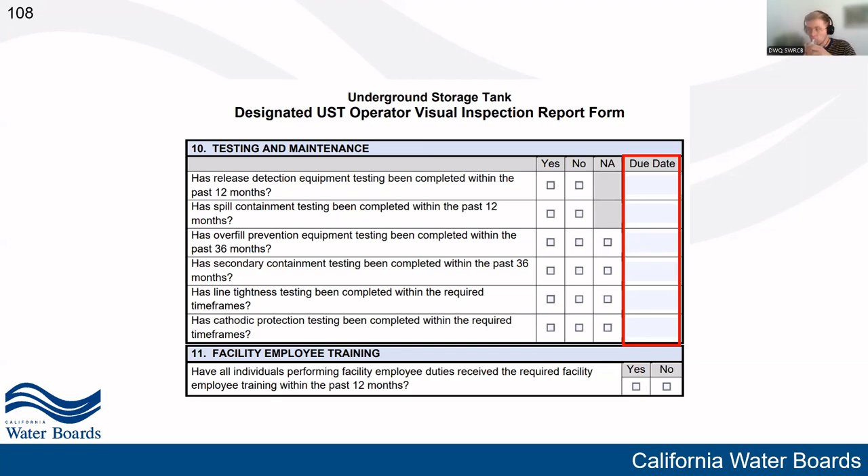All right. Appendix 5 is our release detection equipment testing report form. This replaces our annual monitoring certification form and covers all of our release detection testing.

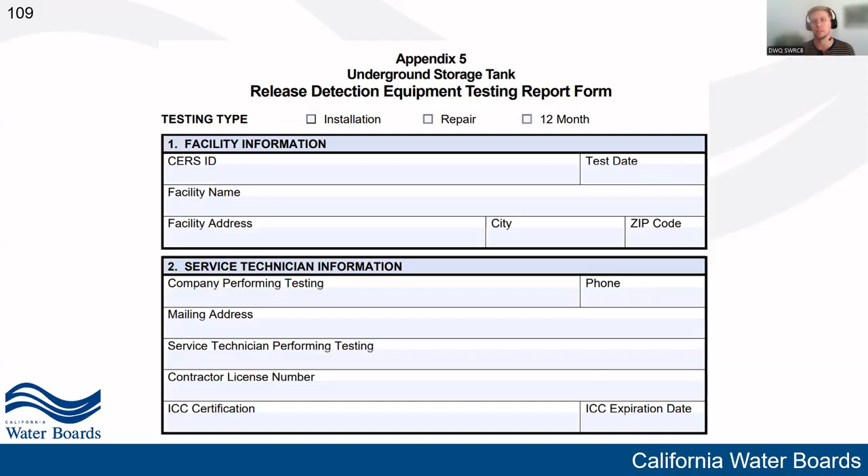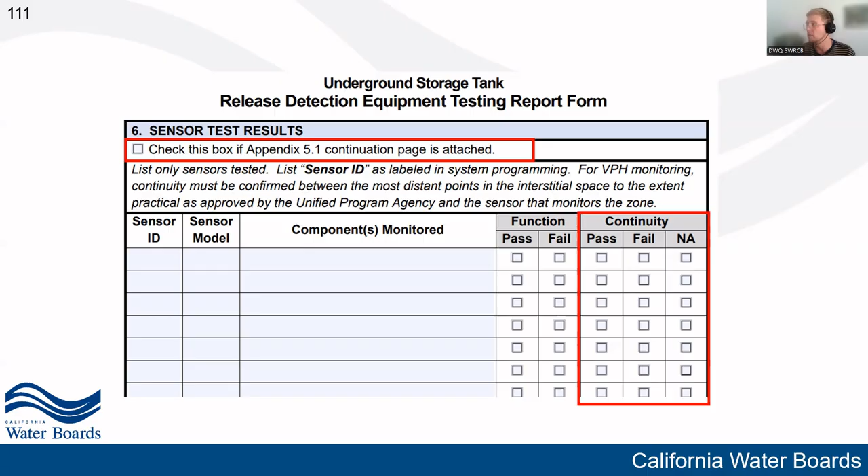Like our other forms, we have continuation pages for Appendix 5 as well. This one being for if you have a bunch of sensors at your site that just don't seem to fit on one page, you can attach 5.1 to it. You'll also see on this page that we've added a box for confirming continuity. This is new. During your release detection certification, you will need to determine whether or not continuity passes or fails. Obviously, maybe there's a situation where it does not apply. Again, here's what that Appendix 5.1 looks like.

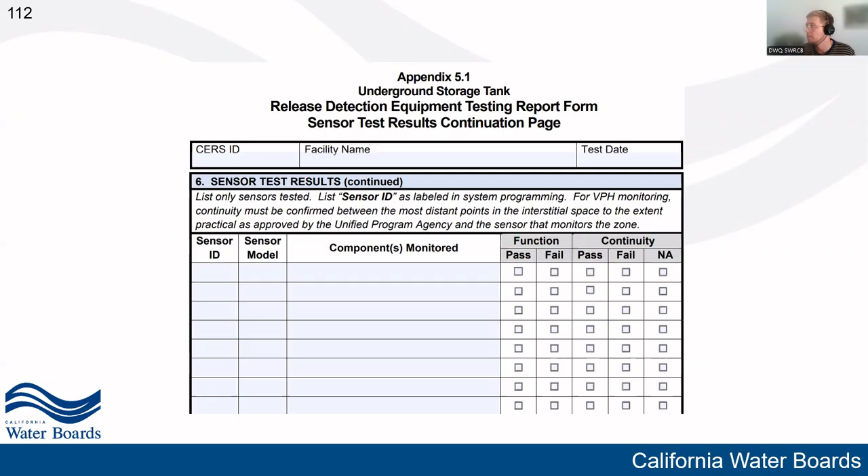Section 8, we're getting rid of. This is for using a tank probe as monitoring equipment, and moving forward, you will no longer be able to use a tank probe for monitoring as far as release detection is concerned. You can still use it for other things like inventory control.

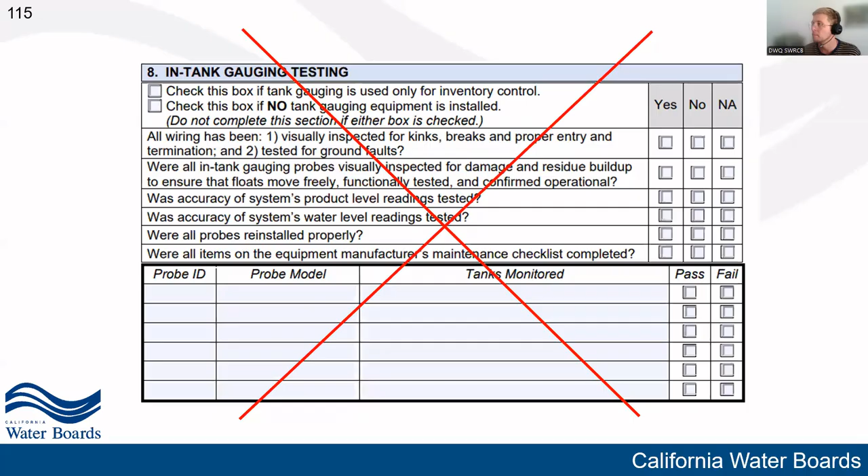Appendix 6 covers our spill containment testing. We've updated the language here to be consistent with other aspects of our draft regulation. Similarly, we have a continuation page for this if you have multiple spill containments that need to be tested.

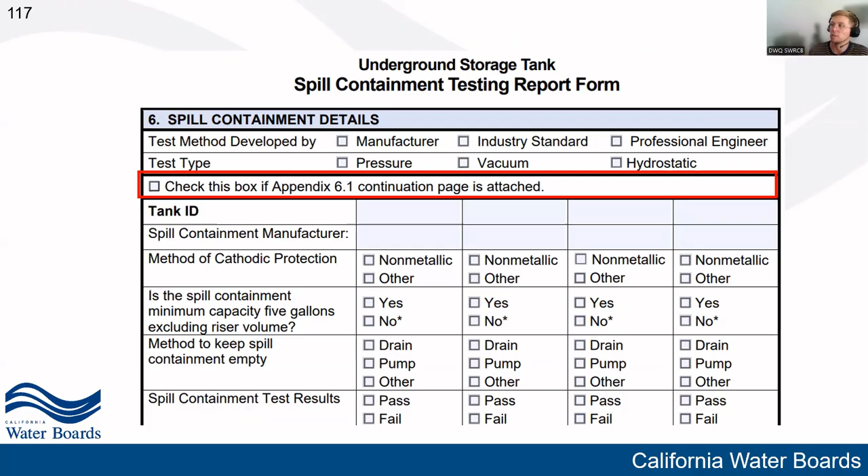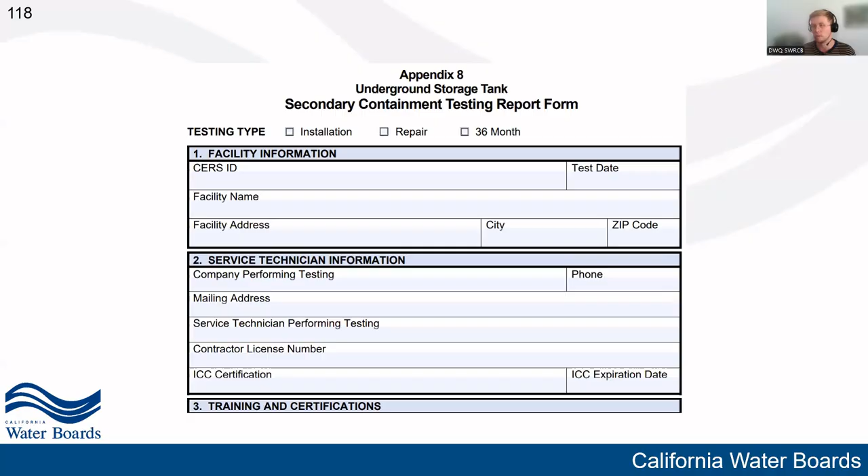Here is our Appendix 8, our secondary containment testing report form. Again, making this front page consistent across all of our forms. We have continuation pages for this as well. For tank secondary containment testing, you can attach Appendix 8.1 if you've got multiple tanks that don't fit on this page. For piping secondary containment testing, you can attach Appendix 8.2 for the same reason.

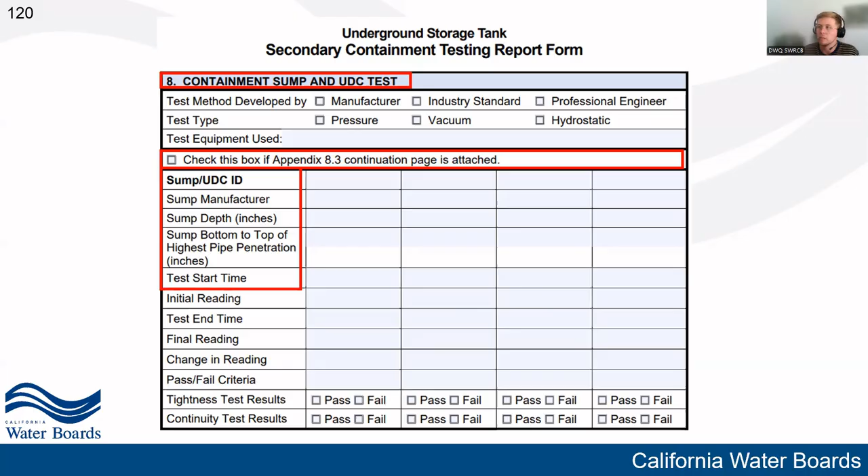Here's our Section 8 that talks about containment sumps and UDCs. Again, you can attach Appendix 8.3 if you have additional sumps. We also have updated our language here for record-keeping purposes.

Appendix 7, this is our overfill prevention equipment testing report form. We're adding requirements for this information for being consistent with our secondary containment testing report form. We've added lines for specifying the tank manufacturer, this helping determine if that overfill prevention equipment is set to the proper height. Wording has been updated also to provide more visual space and make this form just easier to use.

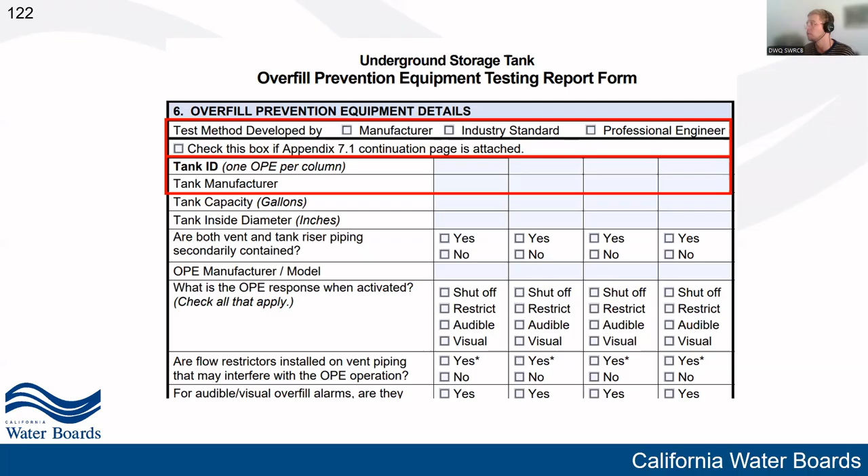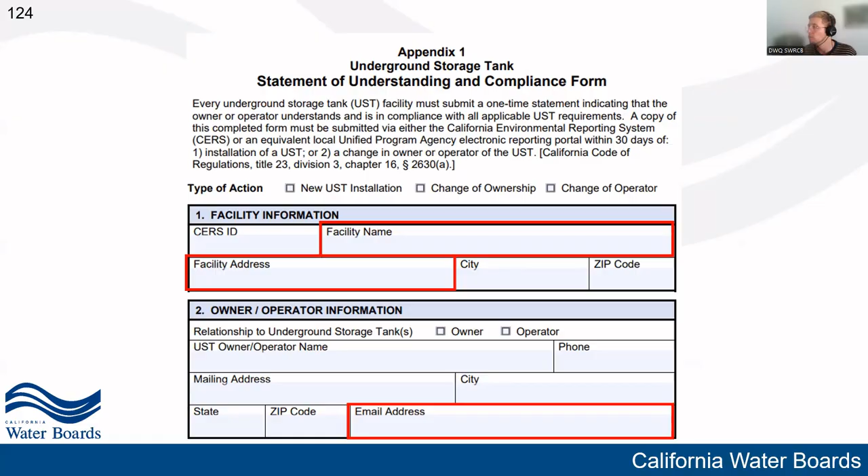Here's our statement of understanding compliance form. We're using facility address and facility name in place of business name and business address for consistency. And we're also requiring email on here for similar reasons. We find that it's a much more effective way of getting a hold of people.

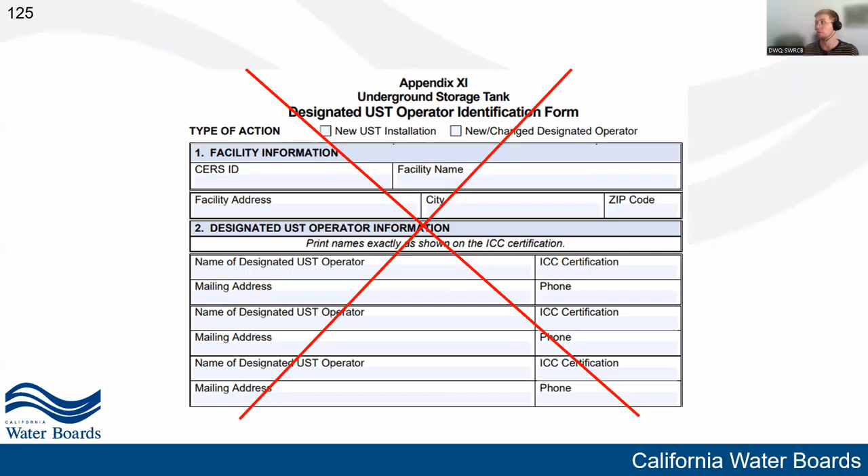We're getting rid of our designated UST operator ID form. If you'll recall at the beginning of our presentation, this is being retired in lieu of the CERS next-gen data fields where you can enter this information instead. Again, that is just a better way to track this information and verify that the person performing the DO visual inspection is the correct person. All right, that's it for the proposed changes.